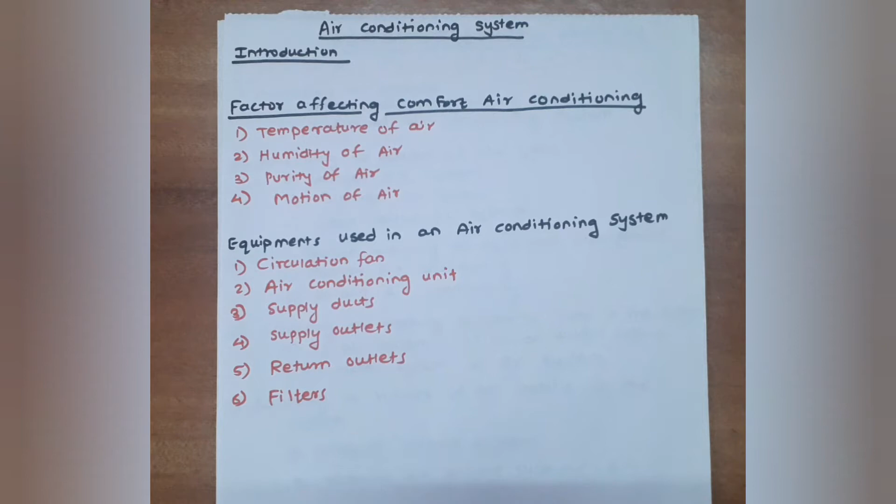The next point is types of air conditioning system. The classification is based on purpose, season of the year, equipment arrangement, substance used in the system, and according to the volume of air handled by the system. We will see one by one.

The first important classification of air conditioning system is based on purpose. According to purpose, air conditioning systems are sub-classified into two types: comfort air conditioning system and industrial air conditioning system. In comfort air conditioning system, the air is brought to the required desirable temperature and relative humidity for human health, comfort and efficiency. The comfort temperature, as already discussed, is 21 degrees Celsius desirable temperature and 56% relative humidity.

If the sufficient data of the required condition is not given, then we assume 21 degrees Celsius dry bulb temperature and 56% relative humidity. Comfort air conditioning may be adopted for homes, offices, shops, restaurants, theaters, hospitals, schools, etc.

The next type is industrial air conditioning system. It is an important system of air conditioning these days, in which the inside dry bulb temperature and relative humidity of the air is kept constant for proper working of machines and proper research and manufacturing processes. Some sophisticated electronics and other machines need a particular dry bulb temperature and relative humidity, and sometimes these machines also require particular methods of psychrometric processes.

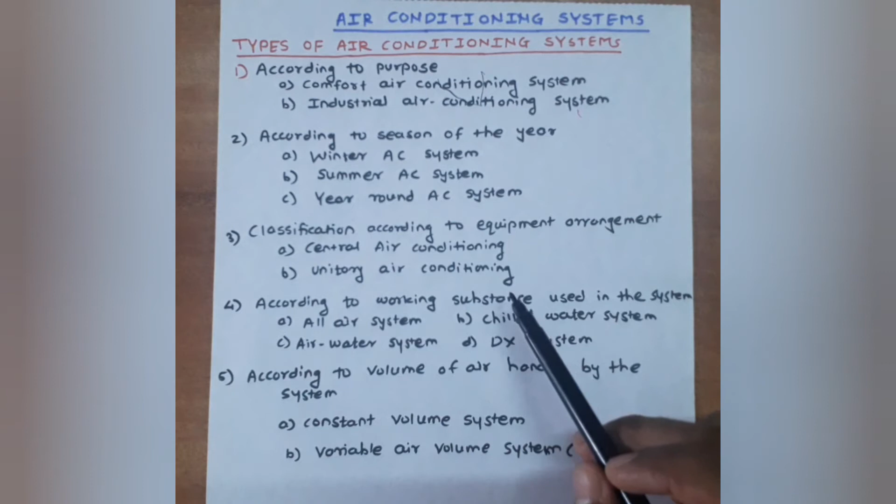The next subtype is unitary air conditioning system, sub-classified into two types: window units and vertical packaged units. Window AC or window units are self-contained units for small capacity of 1 TR to 3 TR, mounted in a window or through the wall.

They are employed to condition the air of the room only. If the room is bigger in size, then two or more window ACs are used. The second type is vertical packaged unit. These are also self-contained units of bigger capacity, 5 to 20 TR, and are installed adjacent to the space to be conditioned. This is very useful for conditioning the air of restaurants, banks and small offices.

The unitary AC systems may be adopted for winter, summer and year-round AC system. The next classification is based on working substance used in the system: all air system, chilled water system, air water system, and DX system. DX is a direct expansion type of system.

The last classification is according to the volume of air handled by the system: constant volume system and variable air volume system. In a constant volume system, the air flow rate is constant, so the name of the system is known as constant volume system.

The variable volume system is an advanced method used in air conditioning systems. In variable air volume system, we can change the air volume by using damper opening and closing. So variable air volume system is the most efficient system, used in industrial and commercial applications.

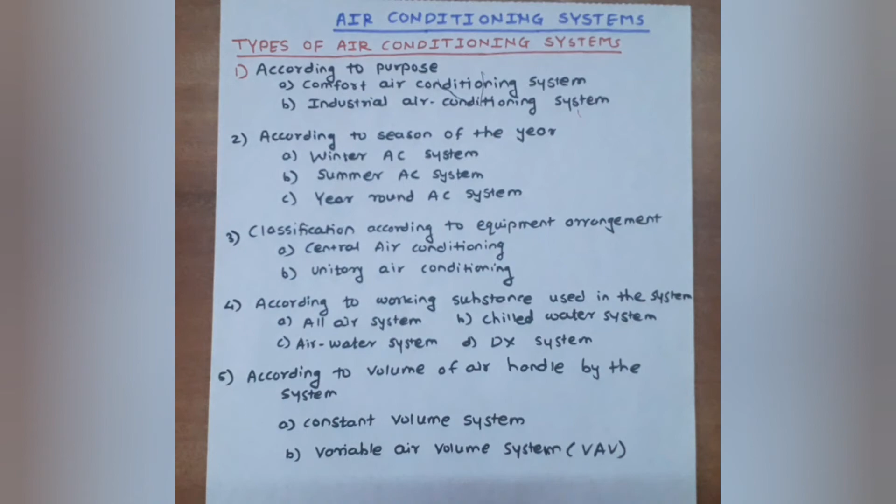The next important point is winter air conditioning system. Already we have discussed classification of air conditioning system, where according to the season of the year, AC systems are classified into three types: winter, summer, and year-round or all-year-round AC system.

Now we will see the winter air conditioning system. In winter air conditioning, the air is heated, which is generally accompanied by a humidification process. The schematic arrangement for winter AC system is shown here.

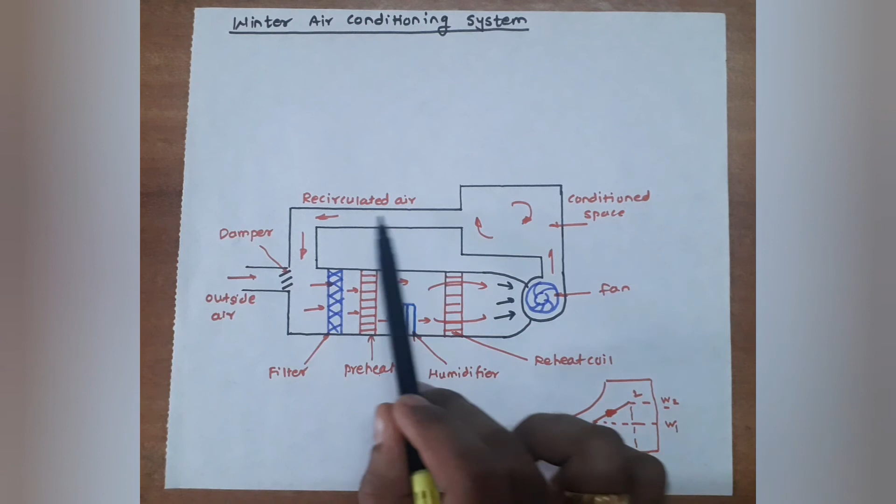The outside air flows through a damper and mixes up with recirculated air. The recirculated air means which is obtained from a conditioned space. The mixed air then passes through a filter.

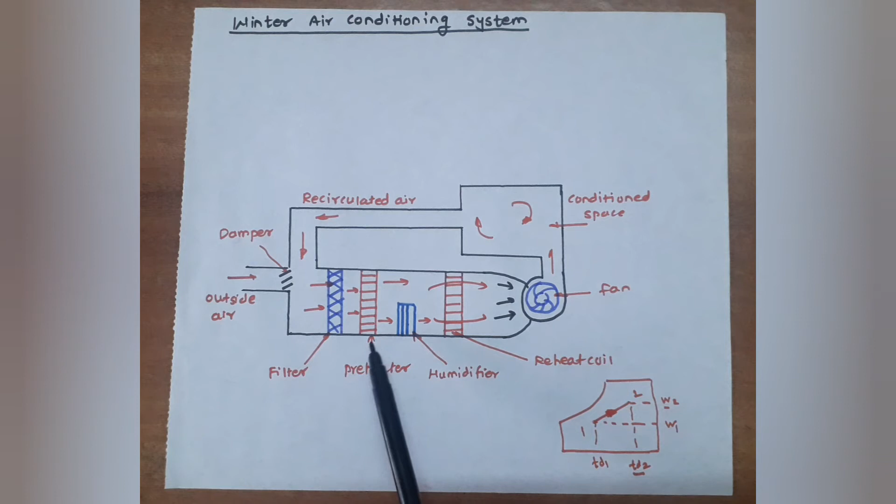Mixed air passes through a filter to remove dust, dirt, and other impurities. The air then passes through a preheater coil to prevent possible freezing of water and to control evaporation of water in the humidifier. After that, the air passes through a reheat coil to bring it to the designed dry bulb temperature. Now the conditioned air is supplied to the conditioned space by fan.

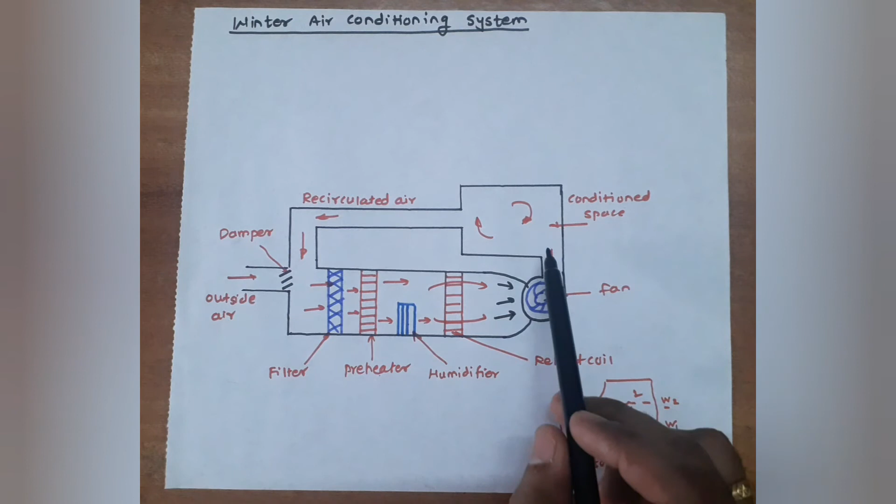Using this fan, the conditioned air is supplied to the conditioning room and it handles the room load, and again it is recirculated in the mixing chamber.

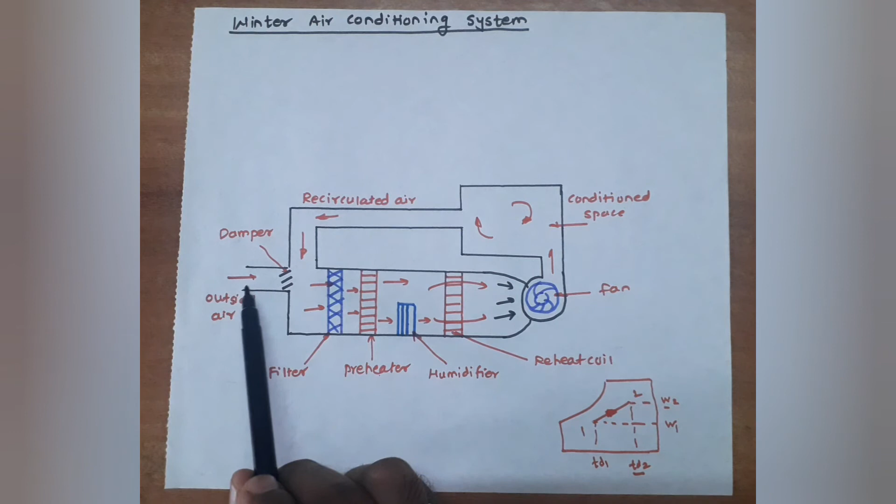For ventilation purposes, outside air is required. The assumption is that 20 to 30% air is exhausted from recirculated air and 70 to 80% air is recirculated, while from outside or the atmosphere, 20 to 30% air enters through the damper. This mixed air enters the mixing chamber, and again passes through the filter, preheater, humidifier, and reheater coil.

The main point for the winter AC system is that the outside conditions have low temperature and humidity is also low in winter season, so the heating with humidification process is used.

On a psychrometric chart, the 1 to 2 process indicates heating with humidification. Condition 1 is the entry condition and condition 2 is the room condition. Condition 1 is at low temperature and low humidity, while condition 2 is at higher temperature and higher specific humidity. The 1 to 2 process indicates heating with humidification process.

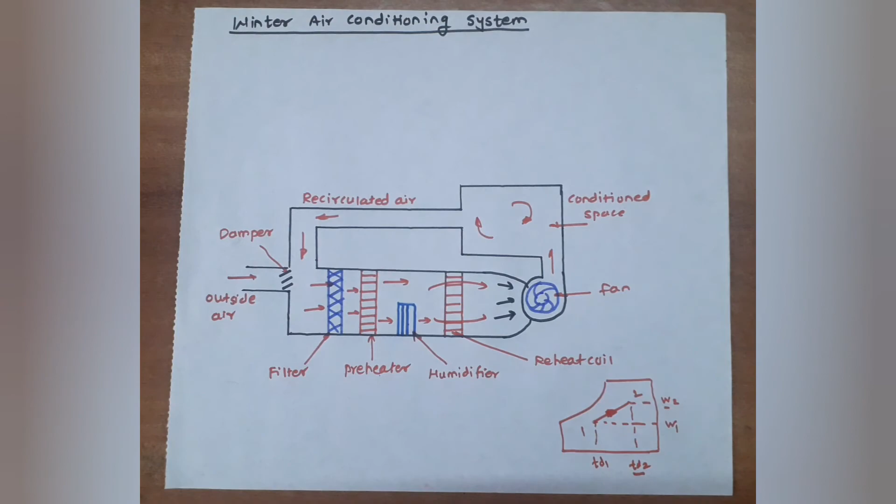The next point is the summer air conditioning system. It is the most important type of air conditioning system, in which air is cooled and generally dehumidified, because in summer season the outside conditions are hot and humid. Mostly this AC system is used in coastal regions.

The air now passes through a cooling coil. The coil has a temperature much below the required dry bulb temperature of the air in the conditioned space. The cooled air passes through a perforated membrane and loses its moisture, which is collected in a sump tank.

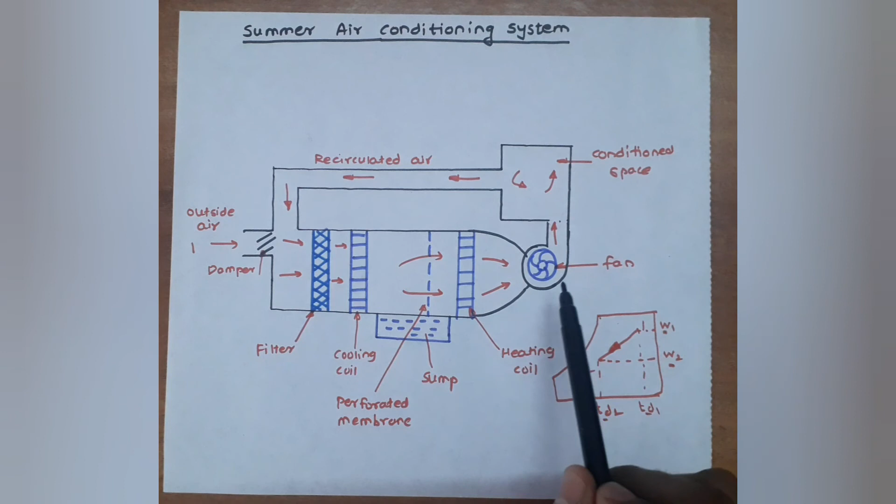After that, the air passes through a heating coil which heats the air slightly. This is done to bring the air to the design dry bulb temperature and relative humidity. Now the conditioned air is supplied to the conditioned space using a fan.

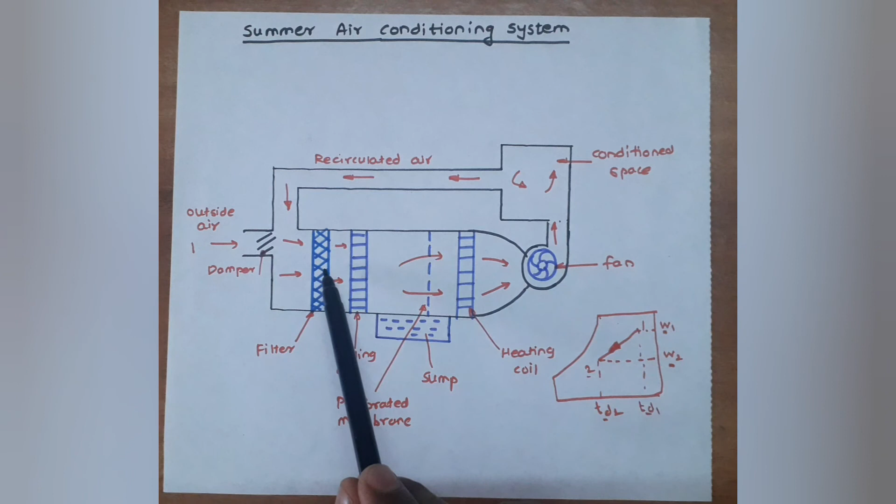From the conditioned space, part of the used air is exhausted to the atmosphere by the exhaust fan or ventilators, and the remaining part of the used air is recirculated, as shown here. The recirculated air again enters the mixing chamber along with outside air, and the mixed air is filtered, then enters the cooling coil, then the heating coil, and by using a fan it enters the conditioning space.

For the summer air conditioning system, the cooling with dehumidification process is used. The 1 to 2 process indicates cooling with dehumidification, because in summer season the outside conditions are hot with high humidity. W1 is the humidity at point 1 and TD1 is the temperature at point 1. After all these processes, we get condition 2, which is the room design condition, at low temperature and low humidity.

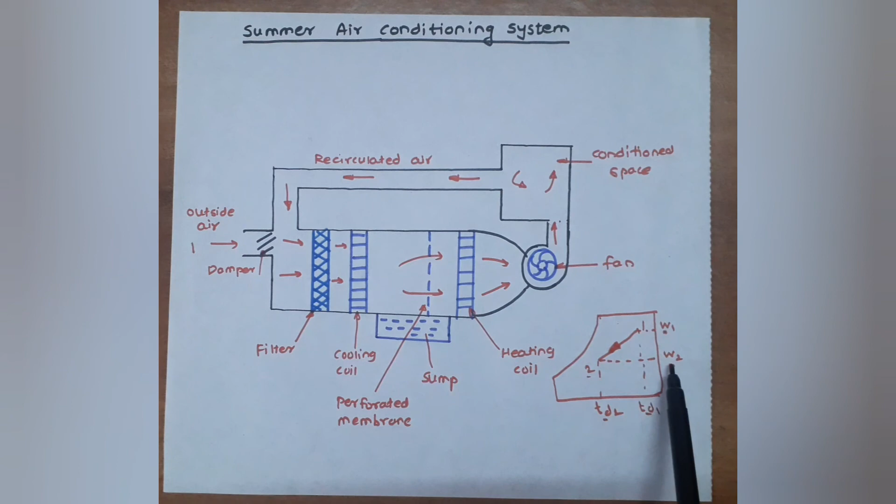In summer air conditioning, the cooling coil is operating and cools the air to the desired value. The dehumidification is obtained by operating the cooling coil at a temperature lower than the dew point temperature, which is also known as the apparatus dew point temperature.

In winter season, the cooling coil is made inoperative and the heating coil operates to heat up the air. The spray type humidifier is also used in the dry season to humidify the air. Basically, year-round AC systems are also known as all-year-round AC systems.

It is a 2-in-1 system, used in both summer and winter seasons.